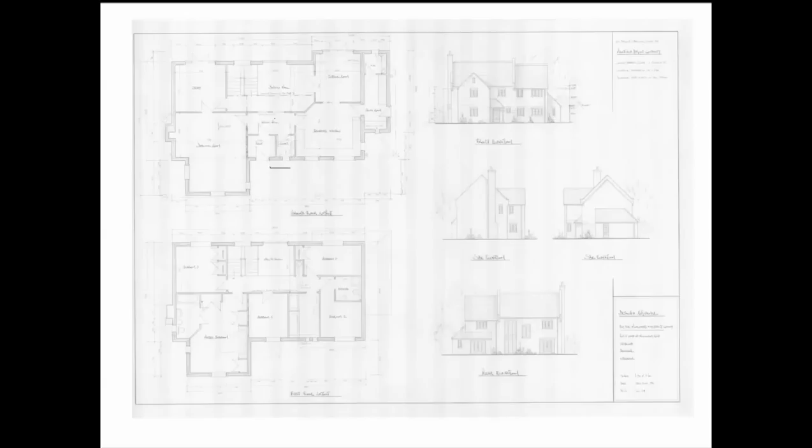So if you have an account with Jewson, for argument's sake, press the button and your set of terms will come down into your software. In addition, on the Jewson catalogue, for argument's sake, there's over 500,000 products. So at any time of day or night, you can go onto our website, onto the Jewson catalogue, and access all those prices. You don't have to wait until the morning to access the prices.

Okay, so a bit of a demonstration now of the scope of what the software can actually do. Now, I don't know how much you can make out on your screens. What I've got here is a drawing of a house that I built as a developer, and I think it was in about '95. And this was a pencil drawing that our technician did. We employed a technician who worked for us full-time, designing extensions and houses. I guess in today's terms, he was probably costing us 30 or 40,000 quid a year. So, a significant investment in order to keep the flow of work coming through the business. I think he would probably have spent 3 or 4 days designing and developing the drawing.

Of course, design is not only just about putting lines on the paper, it is about thinking about it. So that's not to be unexpected. And again, if you bought a drawing like this from an architect, you'd be paying thousands of pounds, no doubt, depending on the architect. Could be one or two, it could be 3 or 4, who knows. They will have a different structure.

So I thought it would be rather fun as an exercise to trace over this house, which I did. It probably took me a couple of hours to trace over it because it's got some parapets and so on that were slightly challenging. But once I'd traced over those, the software would then automatically generate the elevations. And I'm going to be showing you live today how the software does that. And we're going to design a simple project in half an hour to show you how it actually works and develop the elevations.

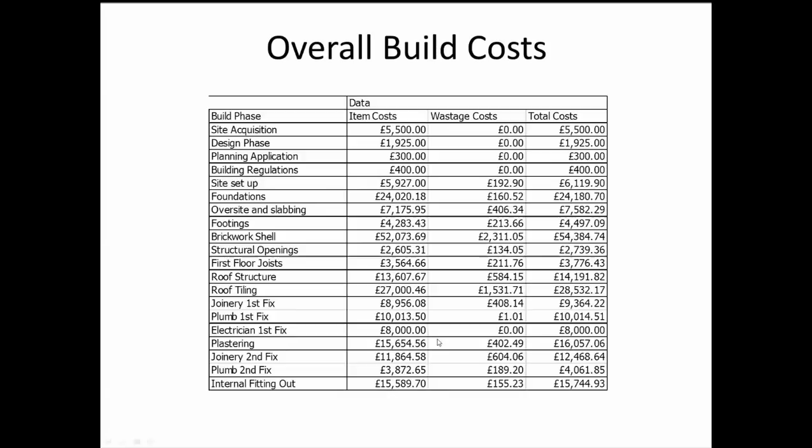This particular view is an analysis of the job by different build phases, total costs. There's another report there showing the cost of the bricks and blocks and labour and so on. And there are literally hundreds of reports that you can produce from the software, and all of those are automatically generated once you've done your drawing. Here you can see we've got a lot more detail. And I'm going to show you how you actually generate this detail in the next few minutes.

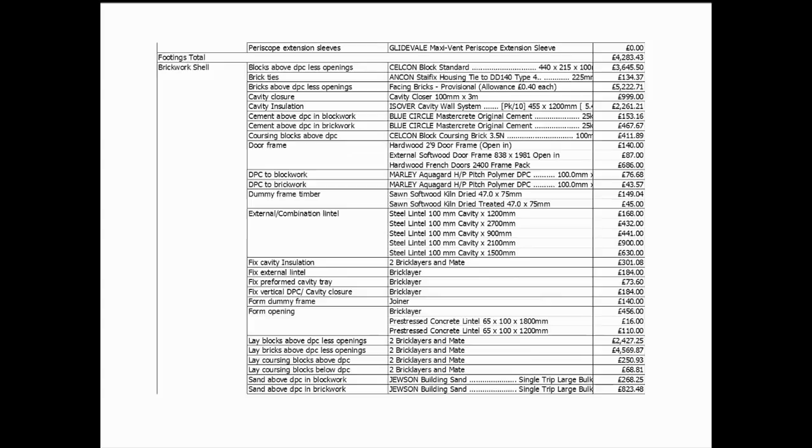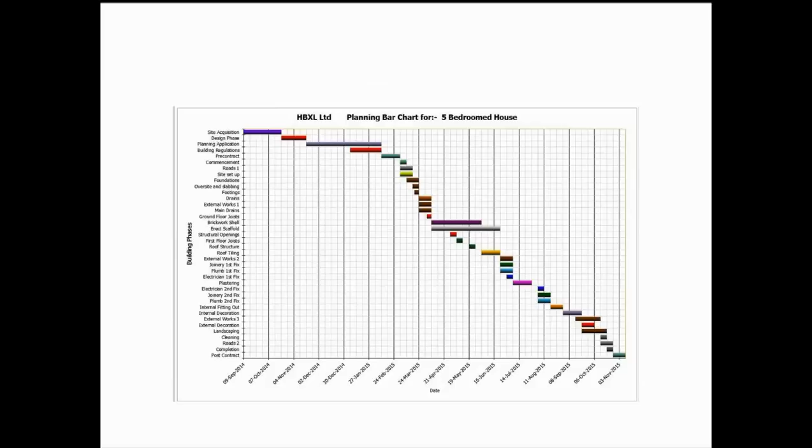You can also, using the onboard Gantt chart system within EstimatorXpress, generate a planning chart, and that itself will generate things such as material schedules, order by dates, cash flow projections and so on. And again, all of that's really easy to use. You can learn how to use this Gantt chart system in 5 minutes. It's not Microsoft Project. It's much more straightforward to use than that, and ideally suited to housing or home extensions.

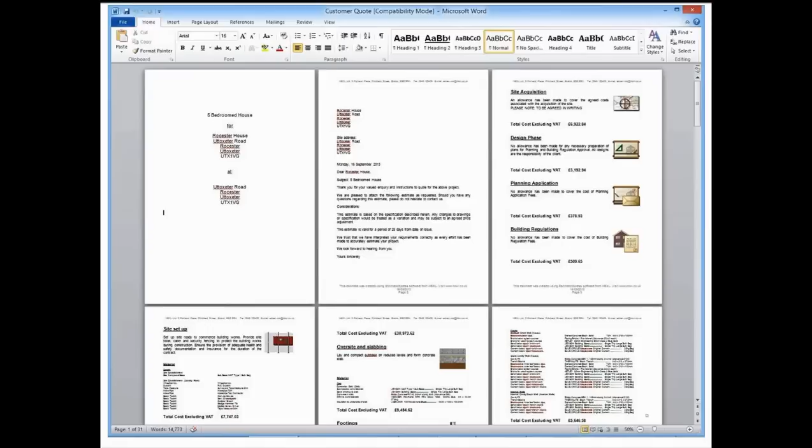Once you've got your estimate, again, you can then press another button and it will produce a detailed quote. If you look at the bottom left-hand corner here, you can see there's a 31-page quote that has been generated by the software. You probably can't see the detail on here, but don't worry about that. We're going to have a look at one in detail in a moment. But again, a huge amount of information is just automatically generated to fully advise your client what it is that's included in the job, and obviously it's worked out the cost of it for you.

As we've said, you've got Health and Safety Expert, which can generate the health and safety information.

And then finally, as we said, Contracts Expert is available. Okay, so that's the sort of scope of the software. What I'm now going to do is to show you a simple design so that you can see the tools that we have available in the software, so that you can start to appreciate that, yes, I think I could actually really learn how to use that.

Okay, so I'm now going to go into PlansXpress, and I've got a blank screen at this stage, and I'm going to create a new drawing. So I go new from template, and from there I can pick the size of paper, the scale that I want to work in. So I'm going to pick an A1 1:50 with title blocks, and you can create your own title block with your own company name and so on embedded in it.

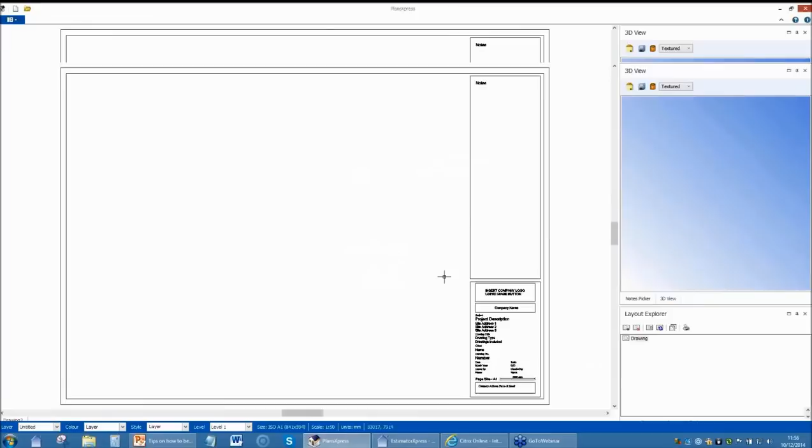On the right hand side here you can see the 3D window that I'm going to briefly turn off while we start to do the drawing. And before I actually start to do the drawing, let me give you a quick guided tour of the scope of the software. So across the top you've got various toolbars. We've got the architectural toolbar where you'll spend most of your life working. We don't tend to use the other toolbars, but it's useful to know that they're there.

We've got the drawing and annotation toolbar, and that allows you to do what I would call conventional CAD work, which is more like AutoCAD for drawing lines, circles, squares, and so on. There are a whole raft of non-estimated symbols. Now they tend to be things like pictures of trees and cars and people, but there's also a whole library of doors and windows that you can embellish the drawing with.

There's an automatic sections generating toolbar. I'm not going to discuss that today because it's a 10 or 15 minute discussion within itself, but that will automatically generate all the sections for you, again with a simple click of the mouse. Modify and selection is a way of stretching and changing the design. So if you've, say, got a particular shaped extension you want to reuse, you can just stretch it rather than redrawing it from scratch. So a job that would take you 10 minutes to draw, you've reduced to 2 or 3 minutes.

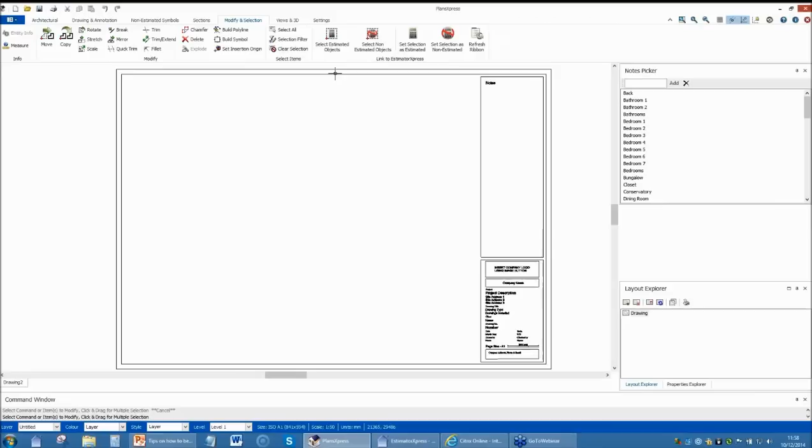Within here you can also select objects on the drawing so that the software ignores them and doesn't estimate them when you export them. So you just pick a wall and mark it as non-estimated. The 3D menu allows you to create 3D images and also to draw elevations, and if you have the Ultimate edition of the software, export it to the photo visualizer, which generates those nice 3D images.

Okay, so going back to the architectural menu, we've obviously got all the different elements: external walls, internal walls, doors and windows and so on. And within each of those elements there are a whole raft of different, in this case, external walls. We've got brick and block walls, cavity block walls, brick and ICF insulated concrete walls, brick and SIPS cavity walls, structurally insulated panels, stone walls, wall cladding, timber

frame, wall starters, basement walls, retaining walls, multi-leaf brick walls for drawing things like garages, brick piers, garden walls. So virtually every type of wall that you can think of, there's a wall there for it. Similarly with internal walls, a whole raft of different walls: internal block walls, stud walls, metal stud and so on.

Doors and windows, we've got loads of different things in there which you can place on the drawing. I'm going to show you how to do that. Same with windows, structural openings, loads of structural openings and fabricated steel, stairs, flooring systems, timber floors, concrete floors, basement floors, rafts and so on. Roofs, cut roofs, truss roofs, structurally insulated panel roofs, flat roofs. Again, we're going to see how those are actually placed on the drawing.

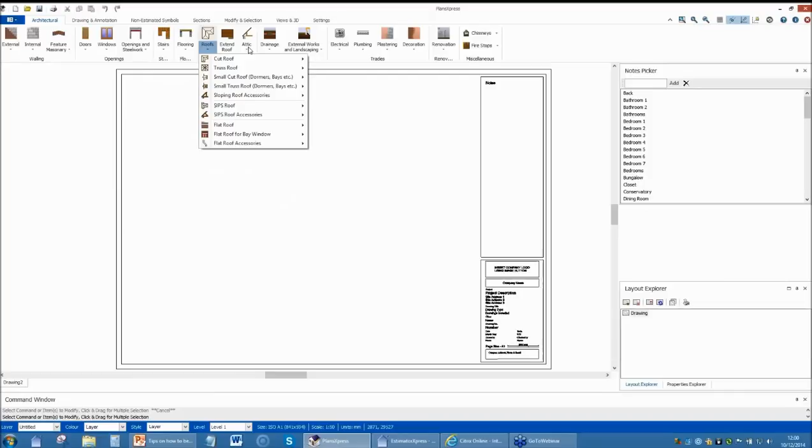Extending roof, that's creating a cat slide roof, as we called it in the Midlands. It seems to have a different name as I go around the country. That's where the roof extends from an upper floor and slides down to a lower ground floor, say. Attic, this will enable you to either do a brand new attic or to convert an existing roof. Again, because it's linked to Estimator, it does all the estimating for that. Domestic drainage, external works, whether that's lawns, paving, block pavers and so on.

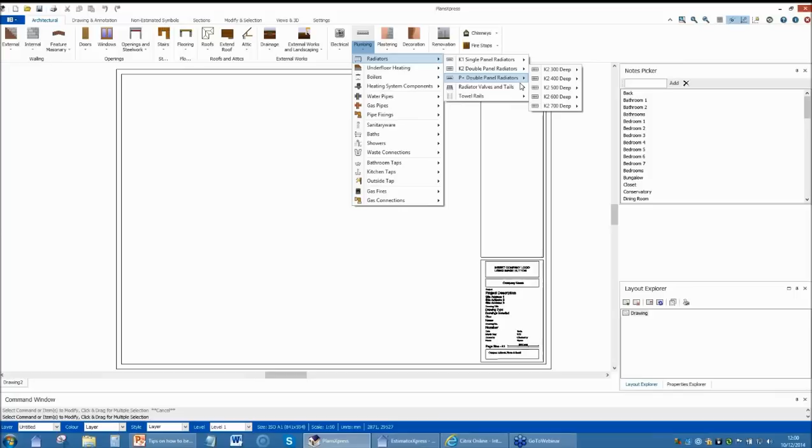Electrics, all the typical internal electrics. Plumbing and heating, absolutely loads of stuff in here to place on the drawing. Numerous boilers and so on.

Now, these three buttons here, plastering, decoration and renovation, they operate slightly differently in that, generally speaking, when you place a wall in PlansXpress and ask the software to estimate it, it will do everything from first dig right the way through the plastering, the decorating on the wall. But of course there may be circumstances where you're doing a renovation job where you just want to plaster or you just want to paint a wall, and you can then draw the wall in the software and then ask the software just to paint and decorate it, to renovate it.

So we look at the renovation tool set for argument's sake. You can see that we've got things like repointing, internal wall refurbs. That's one of my favorite tools actually, in that it does a whole raft of elements such as hacking a wall, replastering it, replacing the skirtings and cornice and dados and so on. So that's more about renovation than design and build, but it's useful to know that it's there within the system.

Okay, so that's the scope of it. Let's actually start to do a drawing. So I'm going to start to do an external cavity brick wall. As I'm going to do a bungalow on this occasion, just to demonstrate the principles because of the time limits that we have, I'm going to pick a 2550 single-story wall. Right, the software then goes away and picks up a dialog to help me design that.

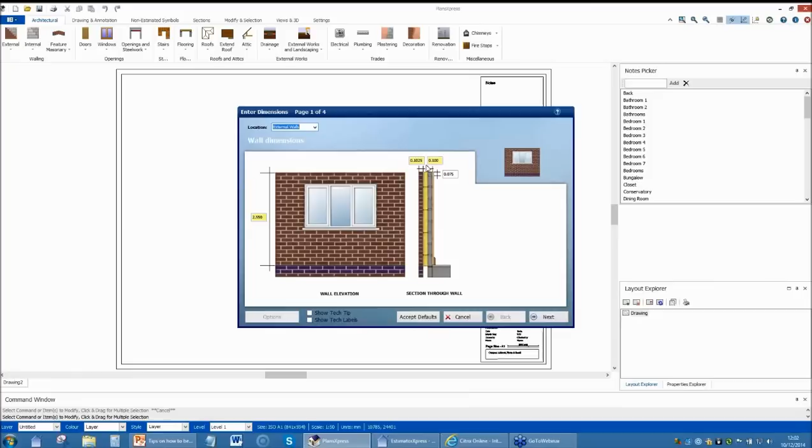Now, if any of you have EstimatorXpress, you'll immediately be familiar with these dialogues because they're virtually the same dialogues that appear in EstimatorXpress. So I can define the location of the walls. Obviously they're the external walls. I can set the height, the thickness of the walls. I can set the depth of the foundation and the width. I can change any of these values as I go along. I can confirm whether I want to plank and strut the excavation.

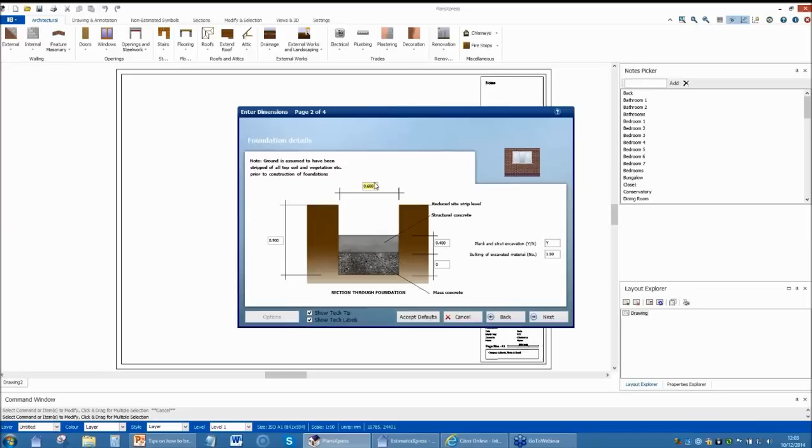Incidentally, the items that are shown in yellow, these are the ones that actually appear on the drawing. The boxes in white are being captured to be exported to the estimating tool. If I click on these two icons down the bottom here and click into any cell, you'll see that it gives me advice about what the software is actually looking for. It's also put some additional labels on the screen.

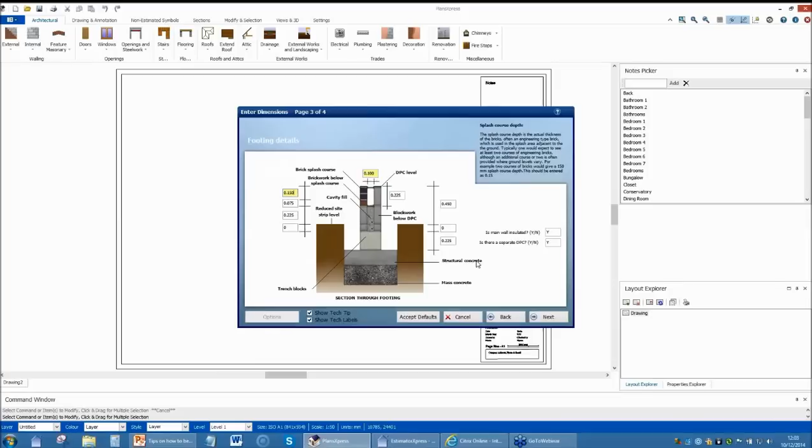Okay, it's now asking me about the footings. Again, I can turn these labels on or off if I want. I can vary the height of the brickwork within the splash course and so on. But generally we've set these up to be standard building regs details. And then finally, I tell the software whether I want to plaster and skirt the walls and decorate them. Now again, because these boxes are all in white, they're being collected for the estimating tool and also for the specification tool. So I'm going to press finish, and I can now place items on the drawing.

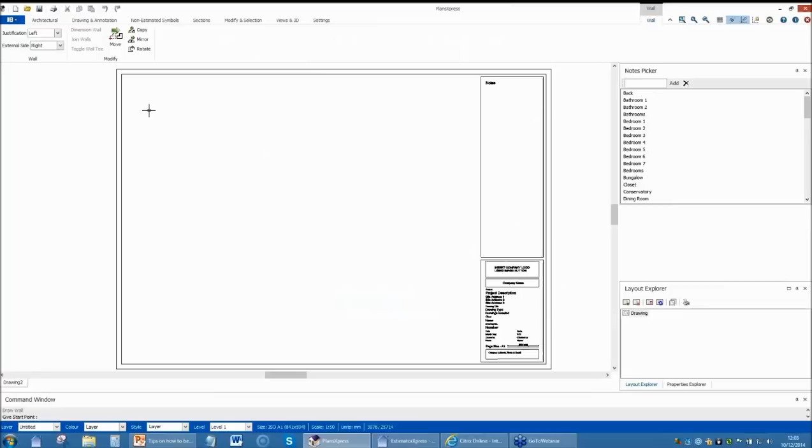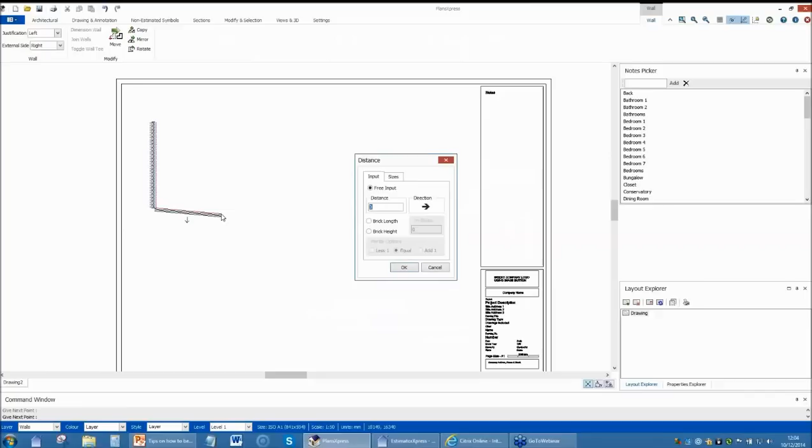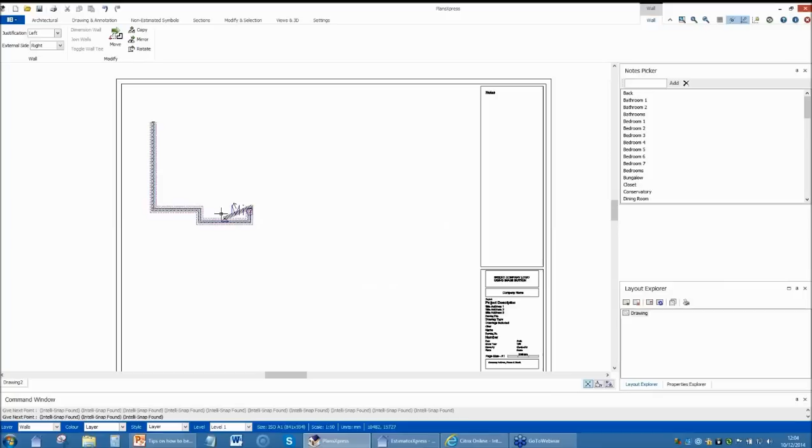Now at this stage I can either place them manually, or I can press the arrow keys on my keyboard and actually enter the dimensions in manually. That's done that one wall. So let's say I want to come across the building 4,500. Maybe I've got a projection coming out on the front of my bungalow. Take that back in, 1,200. Go across, 450. And if I press S on my keyboard, it'll actually complete the overall shape of the bungalow.

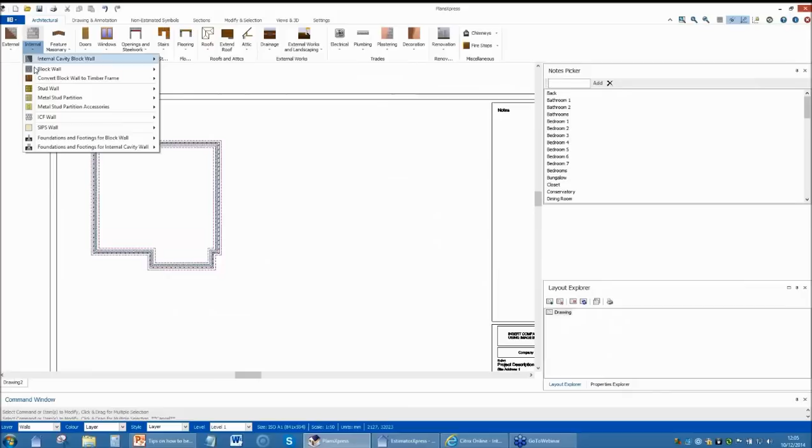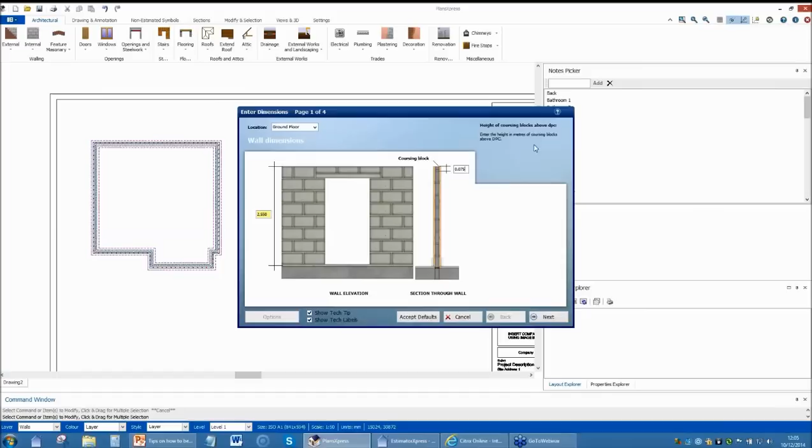So I'm going to do a block wall, 2550 single story again. Again, I can confirm the height. I can put my labels on if I'm not sure about anything. What's going on up here, for argument's sake? That's the height of the coursing blocks. I can set the depth of the foundation, the width, concrete thickness, and so on. I can confirm the height of the coursing blocks and so on.

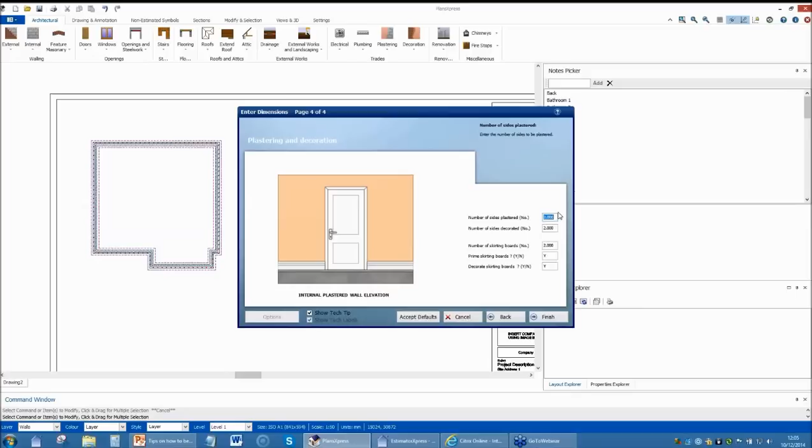So again, it's all perfectly straightforward, and it's just a matter of checking the dialogue, confirming that you're happy with it. In this case, we've got two sides of the wall plastered and decorated, and a couple of skirting boards. I can then place this on the drawing.

Now this time you can see the wall is actually on the incorrect side of the wall. If I use the justification command, it then puts it on the correct side. So I'm going to take up there, and you can see it's found the perpendicular, and that's then drawn that wall. If I wanted to set out a wall from a corner, I can place it on the corner and press R on my keyboard and come down, say, 3,000 millimeters.

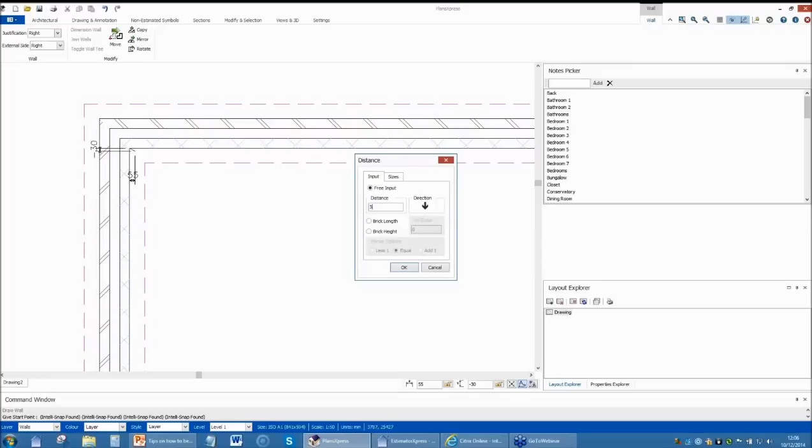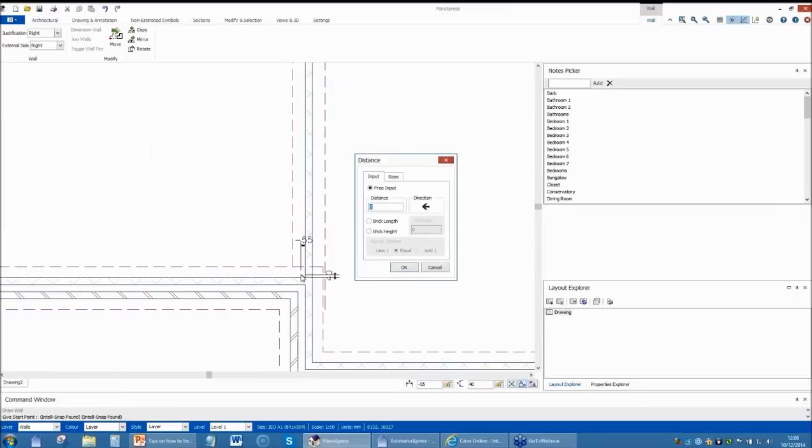Once I've done that, it then again finds the perpendicular and draws it in there. So just as a bit of an exercise, I'll place a corridor in here. I use the same technique: R, press my arrow keys, 2,000, press F7, and place them up there.

So I'm really just working quickly on this. It's not much of an architectural masterpiece, as you can see. I'll just place another couple of walls on here. I just missed that point there. If I want to, I can then move any wall if I'm playing around with the design.

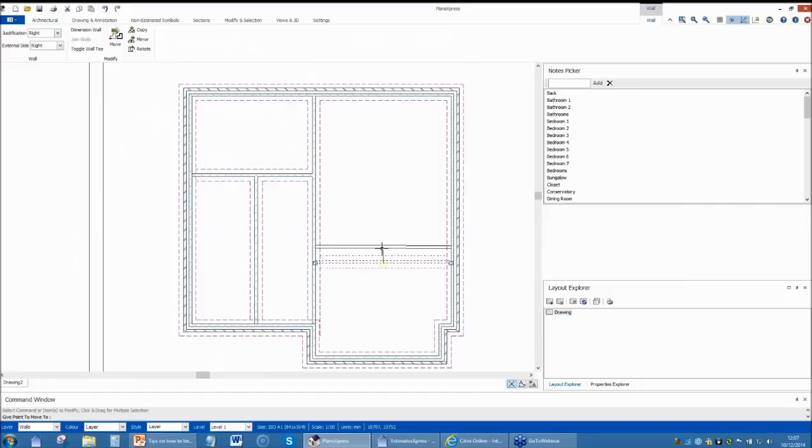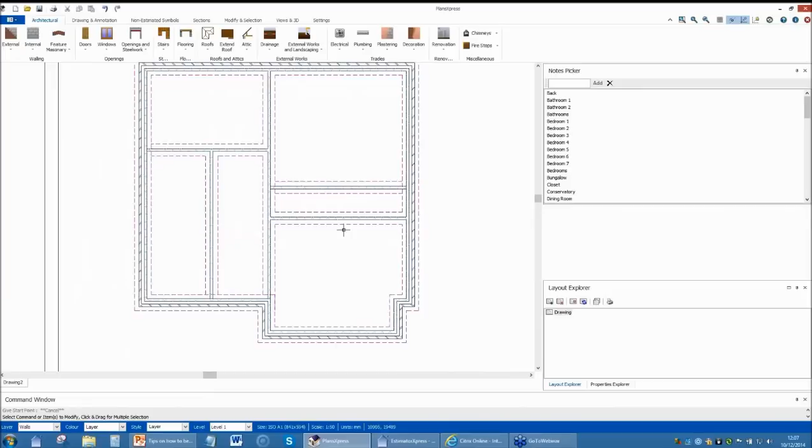Program's running a little bit slowly because of the broadcasting software we're using. Normally it's a bit more responsive than this. Again, we can have a look at the 3D preview to see whether we're happy with the basic design. Okay, as I say, I've probably not done the best job of this, but you get the general idea of it. We may look at this and think, well, that room's a bit long and narrow.

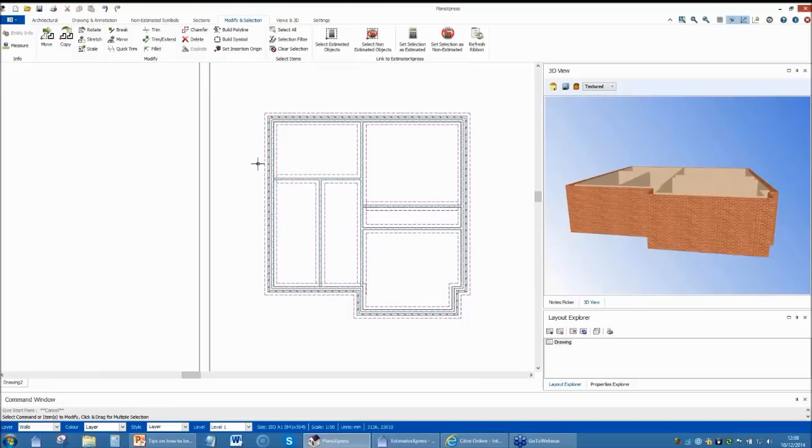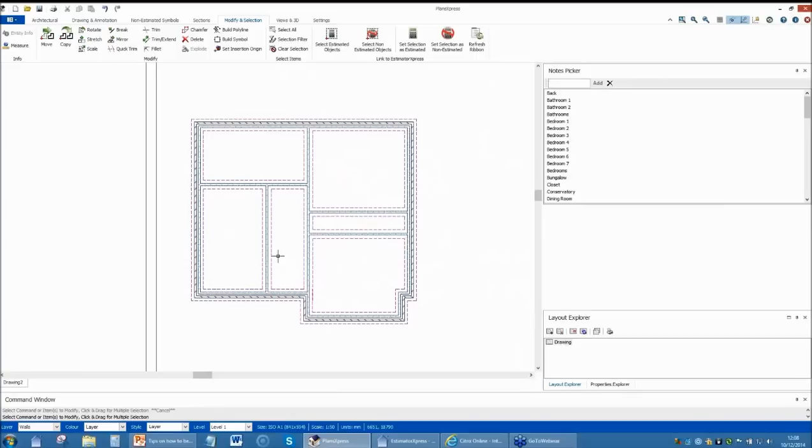We can actually use the modify command. If I find the stretch command, I can find that. Let's just close my 3D a second. I can say stretch that building by 1,000 to get a better shape. Refresh the drawing, and it just tidies up the corners. So you can see that if you've got an existing design, it's very straightforward to stretch it.

Okay, moving quickly on now, we're going to place some doors and windows now. So I'll put the front door on it first.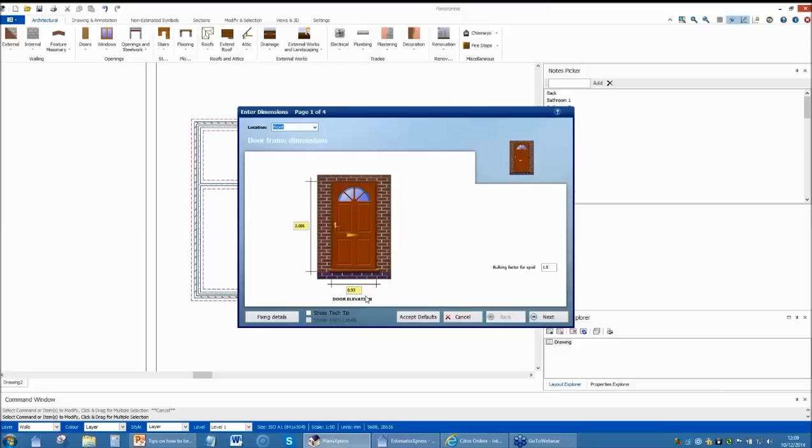Confirm the width and height of the door. Now these relate to a real world door, so when we fire this into EstimatorXpress, it's actually going to estimate the cost for it. So normally you wouldn't change those doors unless you were using a custom door. We can change things like the fixing centers so that it schedules all of the materials, all the fixings for fixing the door.

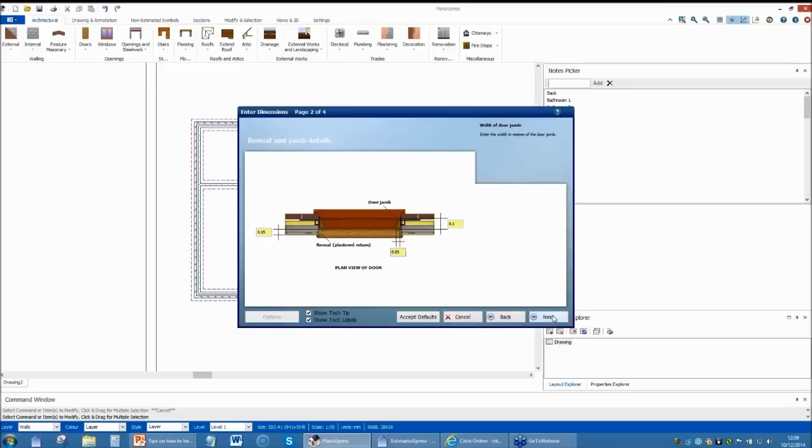We can set the depth. I wonder what's going on here. Let's put the help on again. That's the reveal depth, the depth of the frame as it will appear on the drawing. We can confirm that we want to plaster the reveals, whether we're plastering the sill or using a threshold board, and whether we've got any fixing centres and so on.

Finally, we confirm whether the door is primed and stained and so on. In this case, because it's a traditional timber door, we're allowing for the door to be decorated. I can then place that on the drawing. By moving my mouse around, you can see it hangs the door.

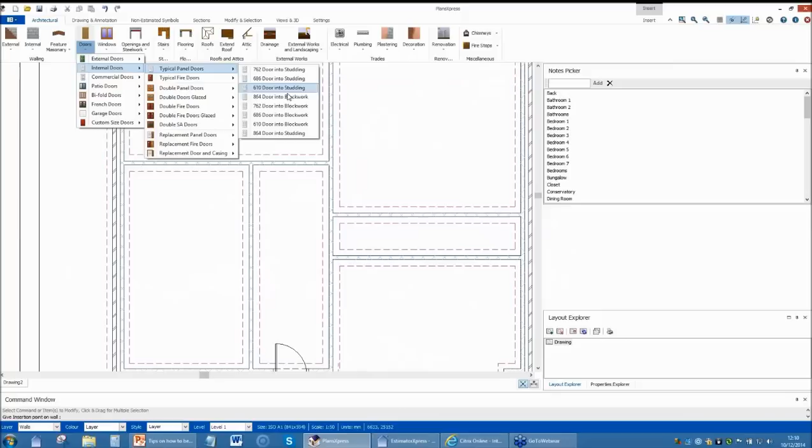And I can repeat the same process for the internal doors. Now, because we're in quite a hurry here, I'm just going to accept the defaults because they're probably pretty good anyway. And the software just allows me to place the drawings, place those as I go around very straightforwardly.

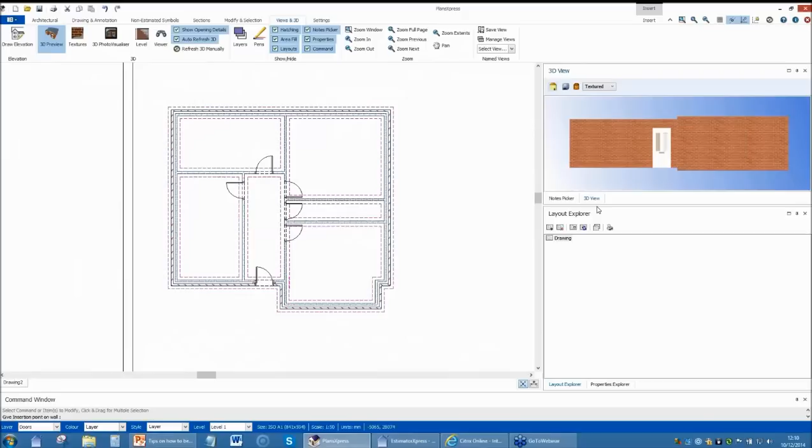Okay, and again, we can have a look at the 3D, see whether we're happy with the general layout.

Okay, so some external doors. I've got a couple of bifolds on the back. They seem to be very popular at the moment. I'll accept the defaults for those.

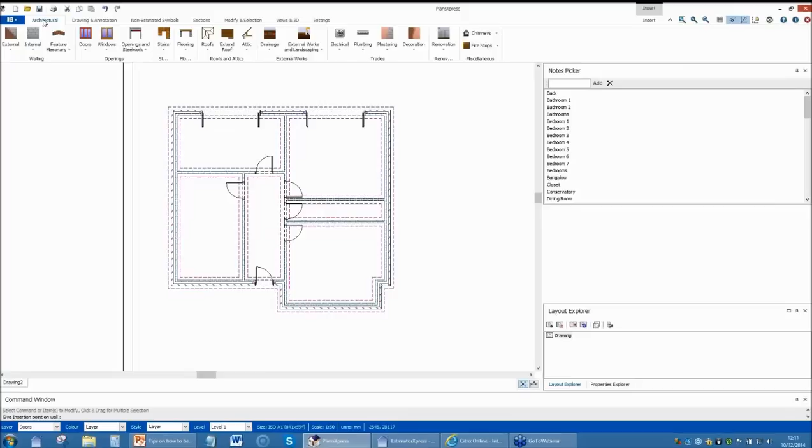And some windows. And we'll put a bay window on the front.

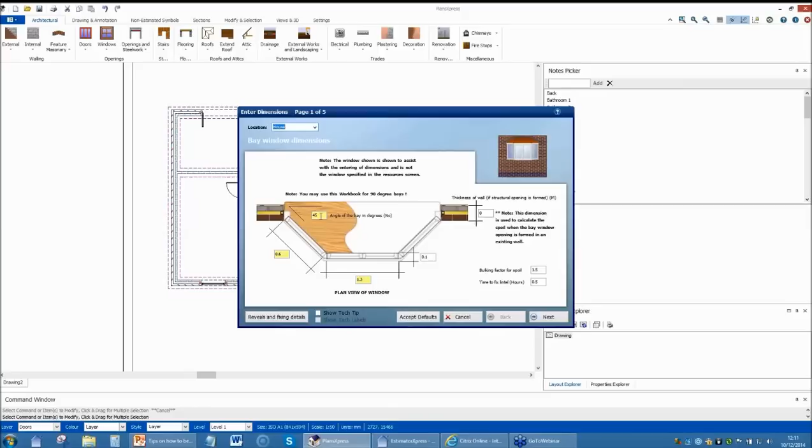Again, I can vary things like the angle of the bay, the size of each of the facets, the height of the bay above the damp-proof course, the height of the window, and one or two other dimensions confirming the frame sizes. And finally confirm whether I'm putting a window board in there and plastering the ceiling and so on.

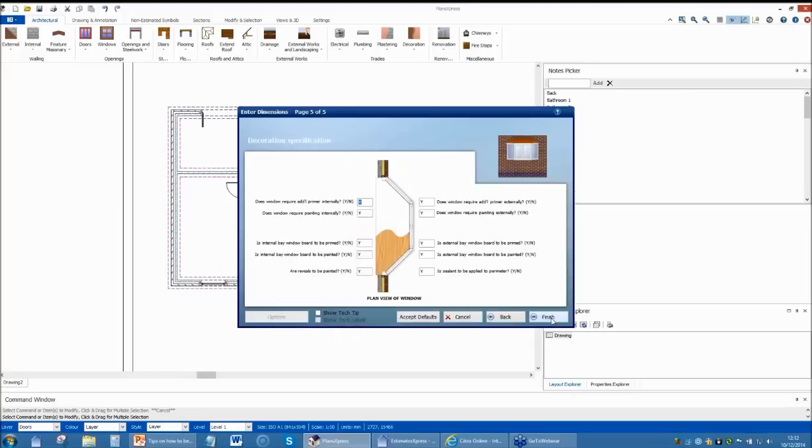Software automatically draws the bay, and while I think about it, I'm just going to pop the roof on. So it's a small cut roof for a bay, say 40-degree pitch. I'm just going to accept the defaults on that for the time being with a hipped roof.

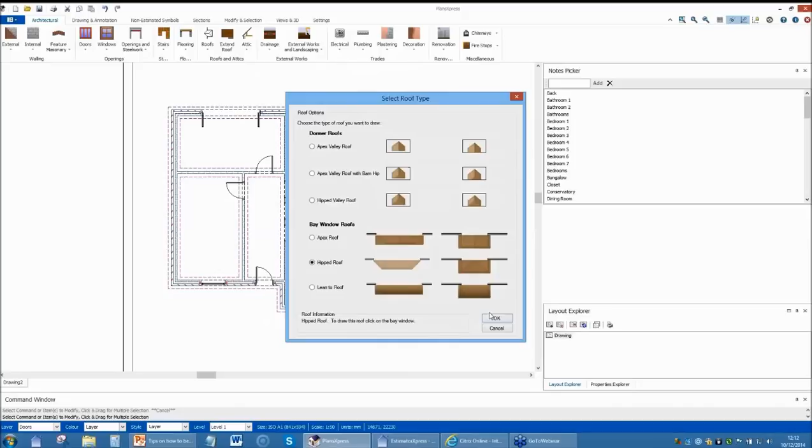So that's done that. So I'll just now put the main roof on. I'll go through that in a bit more detail so you can see how that works. So I'm going to do a 40-degree cut roof.

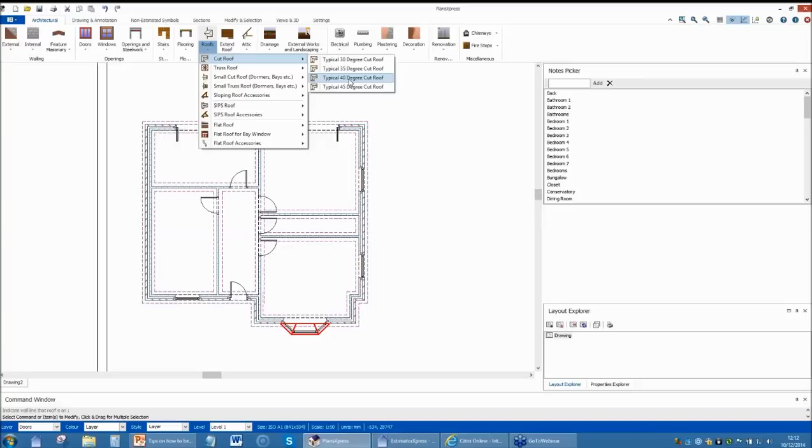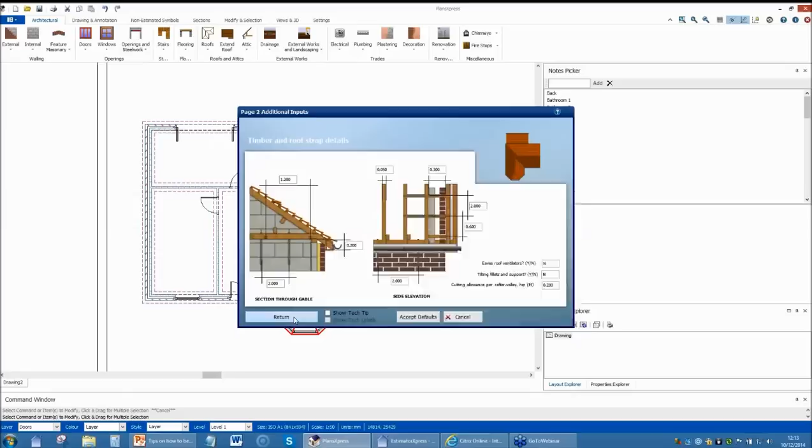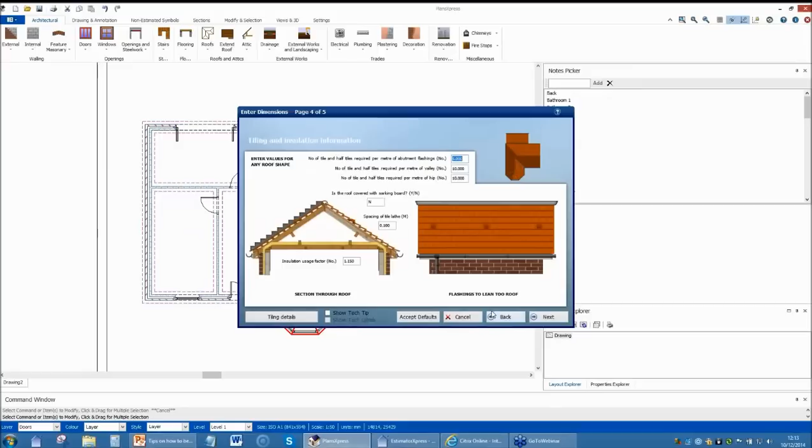So I can confirm the pitch of the roof. Obviously these can be changed. I can set the soffit widths. I can define all the strapping details and ventilators and so on, because the software will schedule all of the timbers for that—9 times out of 10 you'll be going along with the standards. I can define my rafter and joist centres, heights of the barge boards and so on. I can define my gutter bracket fixing centres—maybe we'll tighten those up a bit. I can define my tiling details. By default we have a clay tile in it, so this is all set up for that. And then finally I confirm whether I'm painting my fascias and barge boards.

I know that by default we've got a plastic fascia here, so I'm going to set my decoration to no.

The software then throws up a series of dialogues which allows me to choose the type of roof that I want to do. So we've got apex roofs, apex valley, and abutments where it butts up to an existing wall. We've got hip roofs, hip to both ends, valley hip, and abutment hip. We've got barn hips or Suffolk roofs, depending on which part of the country you come from. And we've got lean-to and lean-to with a hip end.

Essentially, you can Lego-block any of these roof shapes together to give you probably 95% of the common roof shapes that you'll come across, and probably 100% of the roof shapes that you'd like to build. Because as a designer and builder, you can build things that are practical rather than just look nice on an architectural plan. So I'm going to pick an apex roof to go on the main roof of my bungalow.

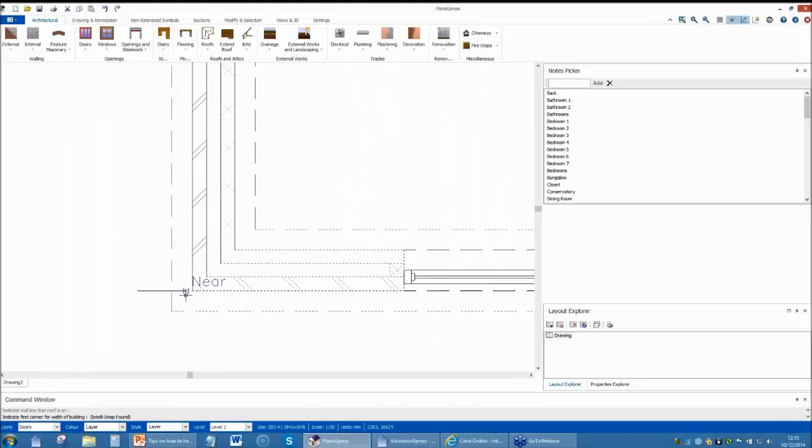Now, incidentally, at the bottom here we've got what's called the command window, and you can see it says indicate the wall line that a roof is on. This gives you a series of instructions for every entity that you place on the drawing. So I'm going to stand it on that wall, and it then asks me to define the first corner and the second corner of the roof across the gable, and then the length of the roof.

And you can then see the red outline of the roof has been formed. Now, what you may also see here is that a dialog has popped up, and this is doing what we call daisy chaining. This allows you to—or reminds you not to forget about crucial things in the design. What's the ceiling? What purlins do you want? What rainwater pipes, and so on.

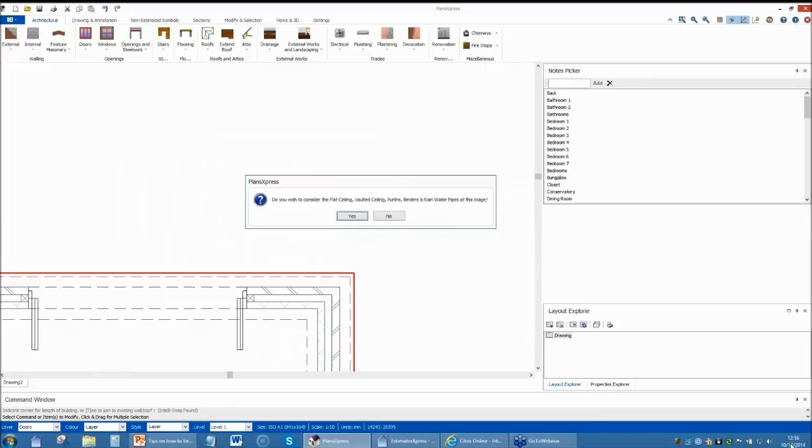So we've only got about a quarter of an hour left to run now. So what I'm going to do is skip through that, so we've got time to look at the estimating tool. But I hope you can see that you can place those sorts of things really quickly. So I'm just going to say no, I don't want to do any of those for the time being.

And repeat the roof for the front projection. Again, I'm going to do an apex roof. Select the wall that the roof sits on. And then again on the command line it says indicate the corner for the roof, either the third corner, or press T on your keyboard and click on the appropriate roof.

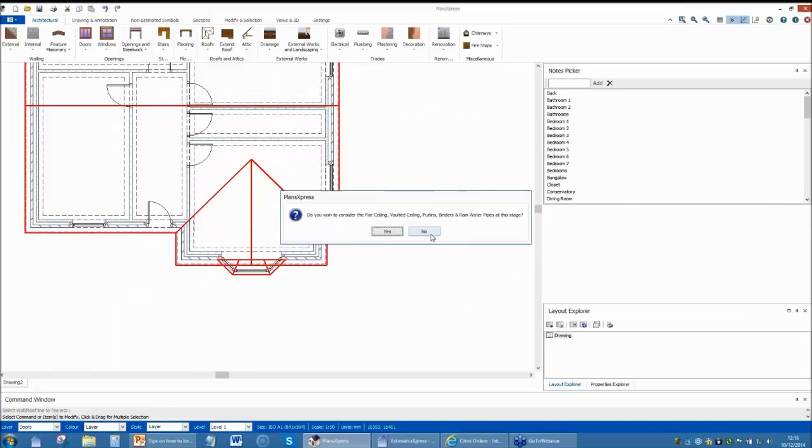And you can then see that it's formed the valley there. And again, it's doing this daisy chaining function, which again I'm going to say no, I haven't got time to do that just now. Okay, so we've now got the basic outline of our bungalow or house, and we've probably spent, I think, about 10 minutes doing this.

Obviously it's not a refined design. In the real world you're going to be spending an hour or two thinking about this, or, as we've said, tracing over an existing job that you think, yes, I want to do something like that, and adapting it.

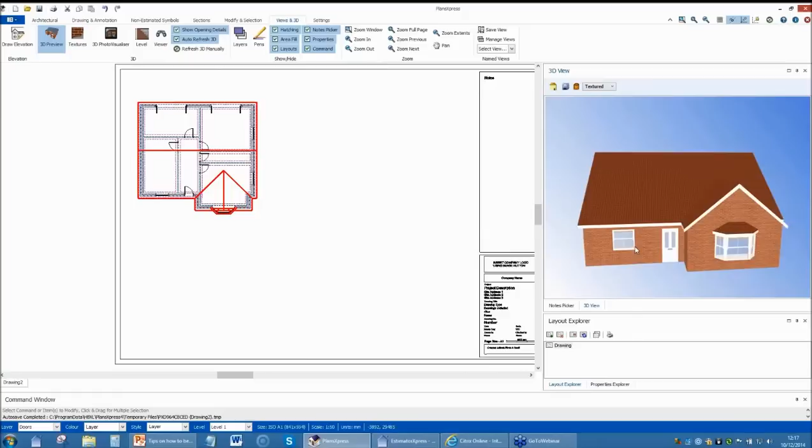Okay, the first thing I'm going to do now is have a look at the 3D again. It takes a little bit longer as it's building the 3D image. And you can see there we've got a full 3D graphic. So if you imagine that you're able to go back to your client with that quality of information straight away, I think that's a big difference compared to going back to them with a 1 or 2 page description.

Okay, now I'm going to quickly show you how the elevation tool works. So I've gone back to my 3D menu, clicked on the elevation. Again, looking at the command window, it says give the wall that you want to elevate. Give your observation point—i.e. where are you standing to look at the elevation. How far into the building are you looking? I'm looking at least as far as the ridge, and the extent of the elevation I want to draw.

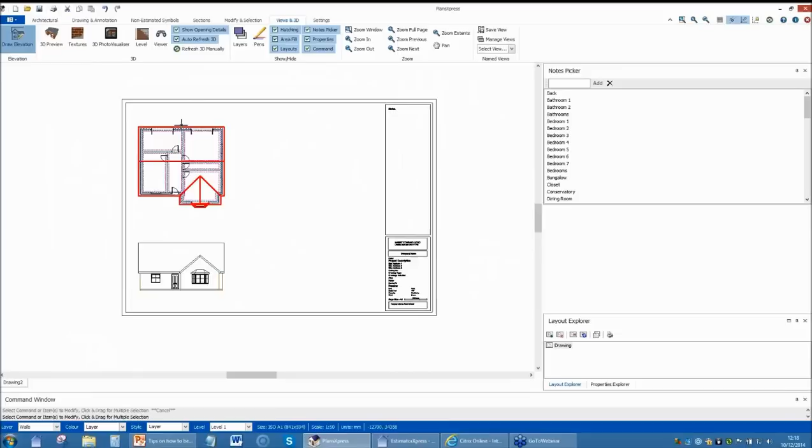I can then position that, and you can see it's developed the elevation for us. I'll just show you that again. Rear elevation: stand at the back, draw as far as the ridge, the extent of it, and then place it on the drawing. I want to make sure I align the damp-proof courses.

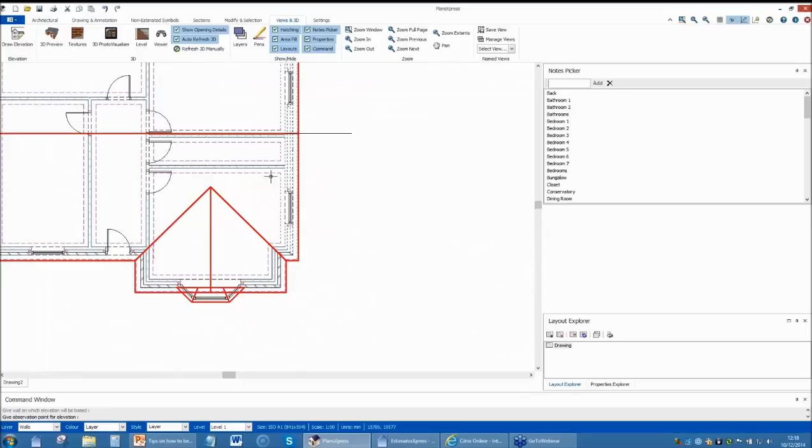The software does that, and then finally a side elevation. I want to go as far as that ridge, pick up the bay and so on, and I'll just place that over there. So again, you can see in a quarter of an hour we've done a very simple job, including the elevations.

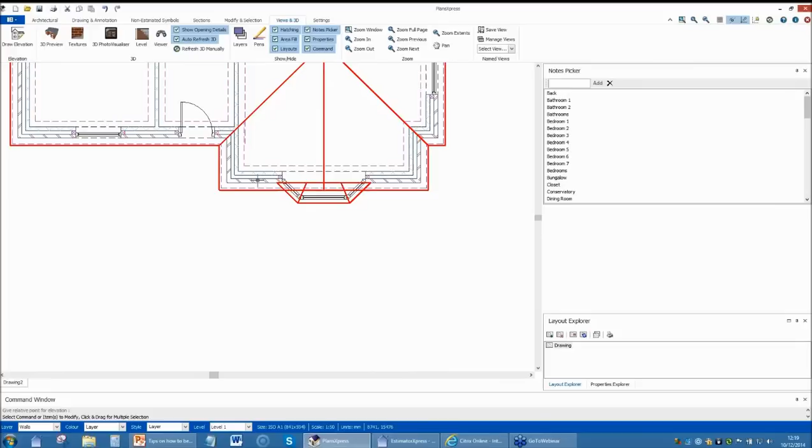Just very briefly to show you the dimension tool: click on any wall, press the middle button, press dimension, and the software automatically generates the dimensions. The software actually works quicker than this when you're not connected and broadcasting over the internet. It's getting a bit confused with the internet there.

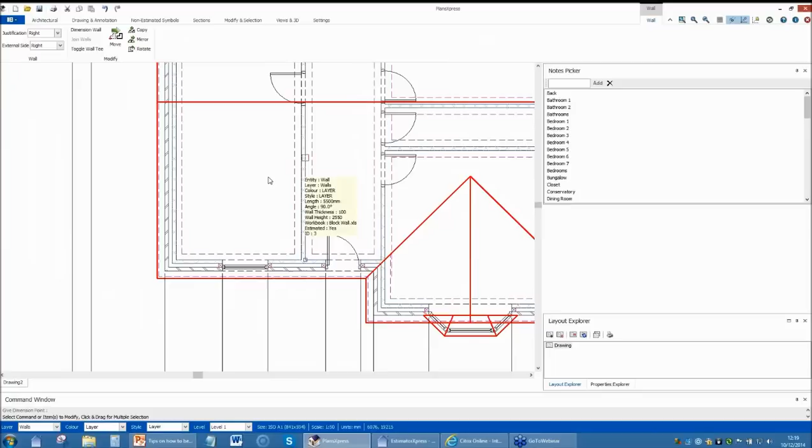So I hope you can see that in a few minutes you can dimension the entire building. Internal walls are exactly the same, using the same process. Just choose the wall, middle click, and place your dimensions.

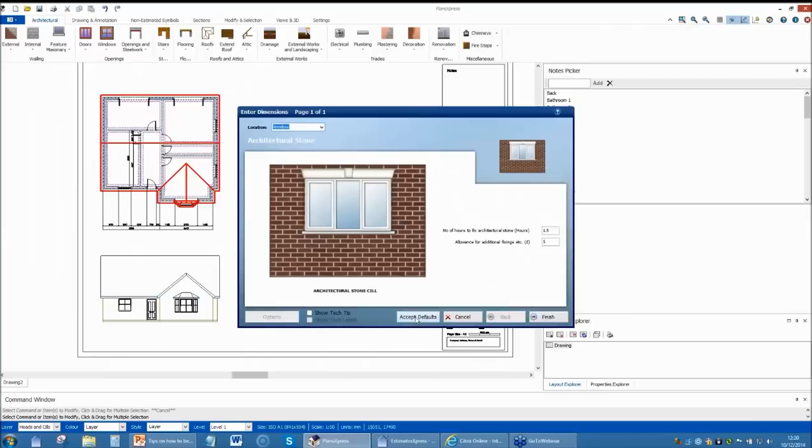Okay, so the other thing that's perhaps briefly worth showing you is the wall detailing. In this case I'm going to put some sills under my windows. So I choose the sill, and I can then place that on the drawing.

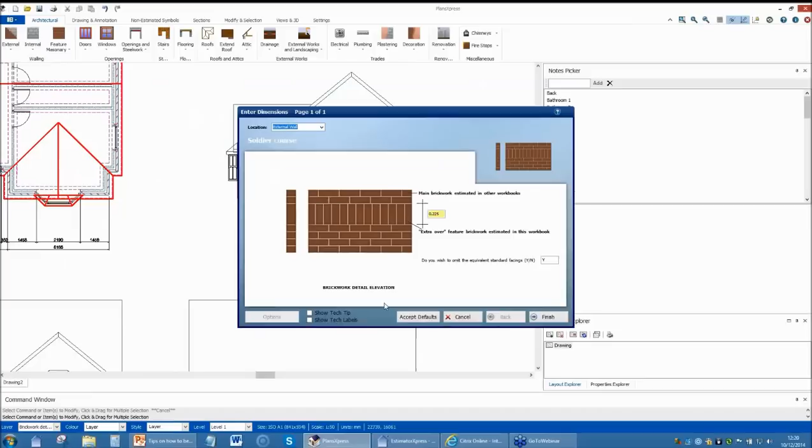And as a little exercise, I'll just show you how to do a soldier course. And there you have it. So, as you can see, within a very short space of time, you can develop attractive looking drawings.

Over here, you can also see that there are notes pickers to place on the drawing, names of elevations and so on. You can also use the tools embedded in EstimatorXpress to automatically generate a whole series of notes that you can either drag onto the drawing or just print out as an A4 set of notes ready to go.

So we've only got 10 minutes left now, so I'm going to very briefly save this drawing. Give it a name — you can still do daft things with your capitals. Bungalow number 1, and save that.

Okay, I'm now going to flick into EstimatorXpress. So here we are in the EstimatorXpress tool set. Just at the risk of stating the obvious, we've actually got two software packages: Plans Express and EstimatorXpress.

You can just buy PlansXpress if you want to and do a design service, or you can just use EstimatorXpress on its own to do estimating. But where the software really takes off is where you get the information from Plans to talk to Estimator, and it does all the input for you in effect.

I'm going to go into the labour section, and here you get an opportunity to input your hourly rates. This is really important because, as we've just been saying, hourly rates can differ dramatically between areas of the country, or indeed particular gangs — you may have one gang that works very cheaply and one that's expensive for better quality work.

So spend a couple of minutes going through that and changing it to reflect the rate that you are paying. That's absolutely crucial. Same with plant — you need to spend a few minutes going through that and tweaking the plant rates. In terms of the materials, as we were saying,

Moving quickly on, because we have so little time, you can then go into the specifications. Again, we set up different specifications for different areas, and we could choose different price books for the different specs. I'm going to choose my master price book. Here in the specification library, you can see that by default we have a number of specifications set up for different jobs. So I'm going to go for the new build Part L spec. The software has been updated to take that into account.

What that allows you to do is set up your own default material for each element within the job. So in this case, we're in the cavity wall spec, and if we look at the bricks above DPC, I can turn a label on to help us see that. By default we've got 40p allowed in there. If I wanted to, I could jump to the price book and choose a more expensive brick to add. Now I've got a 60p brick in there, part of the brickwork shell that attaches the information to the Gantt chart. 60 bricks times 60p is £36 a square metre.

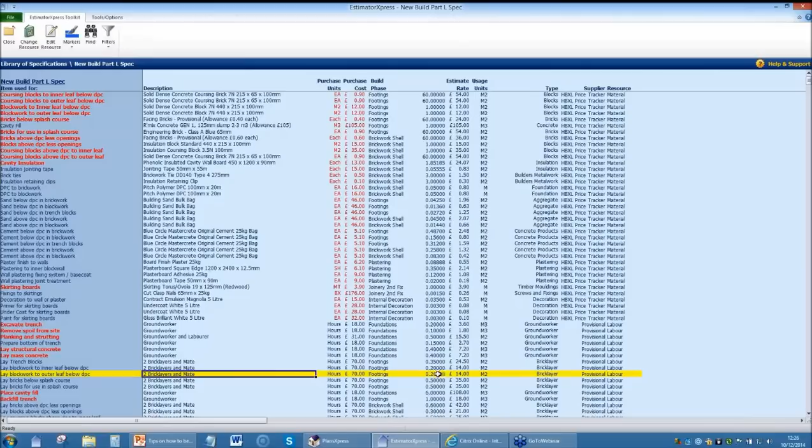So every element in the job is set up in that way. Similarly with the labour, we have a 2-on-1 gang there. You may recall I just changed their price to £70 an hour. By default, to lay a square metre of blockwork, we say it takes 0.2 of an hour, so they're in at £14 a square metre. So every element in the job is specified and estimated automatically by the software.

You can set your own profit margins, and I would suggest that's set at 30 or 35%. I'm doing a demo tomorrow about improving your profit margins, and it's quite clear to me that many builders don't set their margins high enough to cover their overhead. So join me tomorrow if you're interested in that.

Workbooks are all the calculators that do the work and do the estimating. There's a workbook for every CAD entity that we had in the other software. So every time you place something on the software, it estimates it for you. We haven't got time to look at those today, but we may see them in the estimate we're going to do.

Okay, so I'm now going to create the estimate. I give the job a name and a description, and I import the job. So there you can see bungalow 1 that we did at 12:21, 6 minutes ago. I can bring that in there. You can then see a little thumbnail of the bungalow, so you know you've got the right drawing. Press next, choose the price book with my £70 labour in there and my other elements.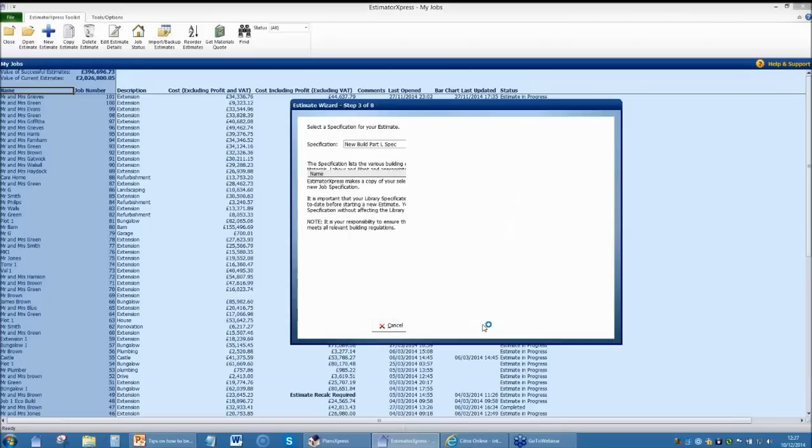Choose the specification. I'm going to pick the Part L new build spec, which has got my new 60p bricks in. I pick the Gantt chart, the planning chart for the job, and when I'm going to start it - January 2015 on the 12th. It's a bungalow, and I put the customer's name in. That used to be my old stomping ground, Leicestershire, where I built all my building projects.

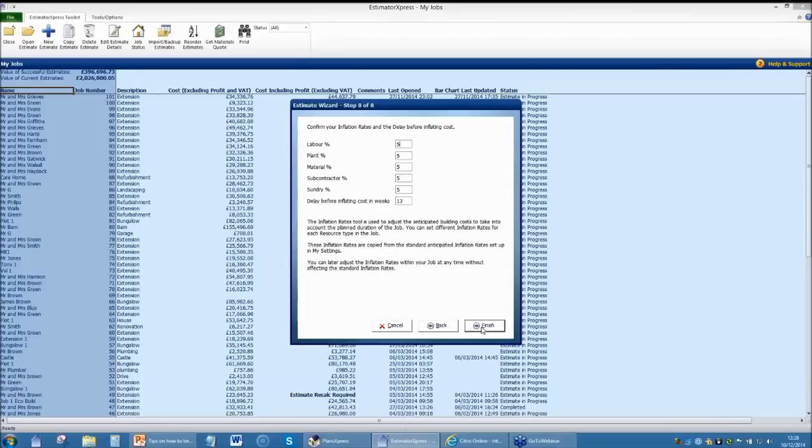Set the profit margin at whatever rate you're comfortable with. Set your rate of inflation. What this will do is automatically build in an element of inflation for the job based on the Gantt chart that you've just created for the estimate.

So the program will now go away and pull in all the geometry from the CAD system. It's going to bring in only the elements we've laid out - obviously the external walls, internal doors and walls, external doors and windows, roof and bay and so on. At the moment, you've probably noticed we didn't have time to put the slab in or lay out the drains, but all of those elements could have been placed on the drawing, both from a design perspective and also from an estimating perspective. Clearly it's going to take a little bit longer than a quarter of an hour to do, but hopefully it's going to give you a good idea of what the software will do. So it's pulling in the geometry of those elements.

It's looking up the latest price book, and in the ordinary way we would have refreshed all those prices from the web with a single mouse click. That normally takes a couple of minutes. So you know you've got your live pricing from, say, Jewson's. You know that you've tweaked the labour rates to reflect your world, the same with the plant.

You've picked the specification, the new Part L spec, so that you know that you are devising a job that is to the current building reg specification, and the software is doing the rest for you. So you can see there it's starting to pull in the information. It's done the front door and the walls and so on.

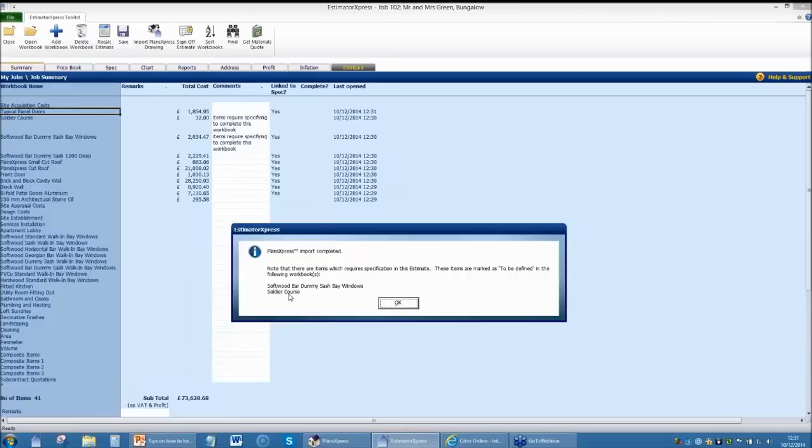Okay, you can now see that the software has completed the import, and it's asking us for a little bit of information. We need to define the soldier course, for argument's sake. What sort of brick do we want to use on that? I'm going to ignore that for the purposes of this.

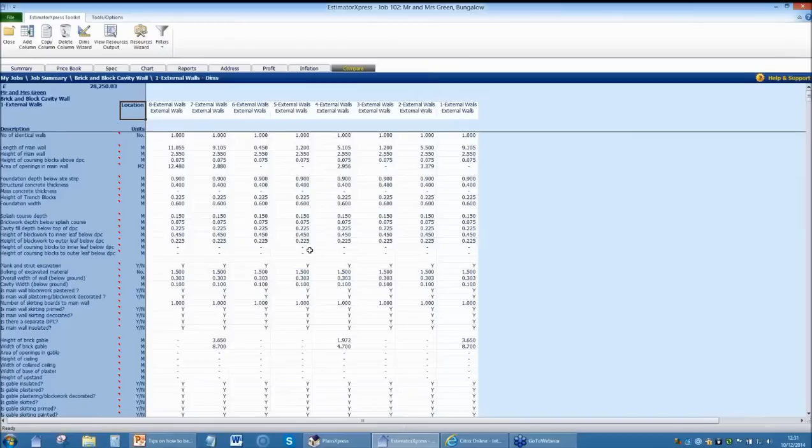And if we have a quick look inside the estimate, let's say the brick and block cavity walls, you can see we've got that cost for them. The software has imported all of those walls directly into the software. It's picked up all the geometry. It's done some calculations, and it's then associated each of those areas, lengths and volumes with the different elements within the job. So for argument's sake, you can see those 60p facing bricks. There's 123 square meters of those.

If we go to another view on the software and look at those same bricks, there's those bricks at 60p each, £36 a square meter plus wastage. The software automatically adds that in. 123 square meters, £4,450 plus wastage. So there's a budget of £4,784, and the software is telling us, including waste, that we need 7,974 bricks for that little bungalow.

That sounds about right, doesn't it? If you'd asked me to guess it, I'd have said there was about 8,000, so clearly the software's in the right ballpark. Similarly, brickwork above DPC, there's the labour rates. It takes 0.6 of an hour to lay a square metre of bricks, £42 a square metre. Same area of bricks and a budget for doing that. And the software has done that for each and every element within the estimate.

Okay, now in terms of creating your specification for the job or your quote for your client, it's simply a question of asking the software to generate a quote for you. So I'm going to ask it to do a quote by build phase. That means the software will break it down phase by phase. What are the costs of the foundations, walls, roof and so on.

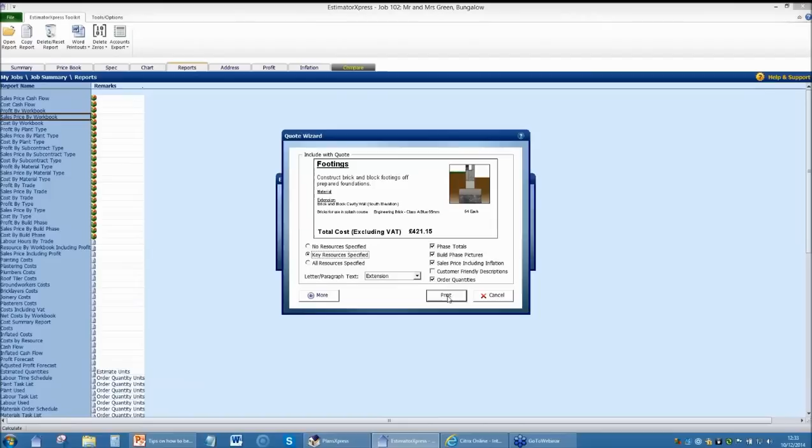I'm going to put the quantities in quickly for this exercise, press print, set the rate of VAT, there's no VAT on this new build, click OK, and the software will generate the quote for you. See, it's building the items for you. So it's merging all the information from all the different elements of the job to give you your quote.

Now you can embed this on your own letterhead, or you can design your own letterhead within the software, and it will automatically print that together. You can devise your own letterhead, your own opening letter for it. By default, we've got a standard letter. I'll just enlarge this for you.

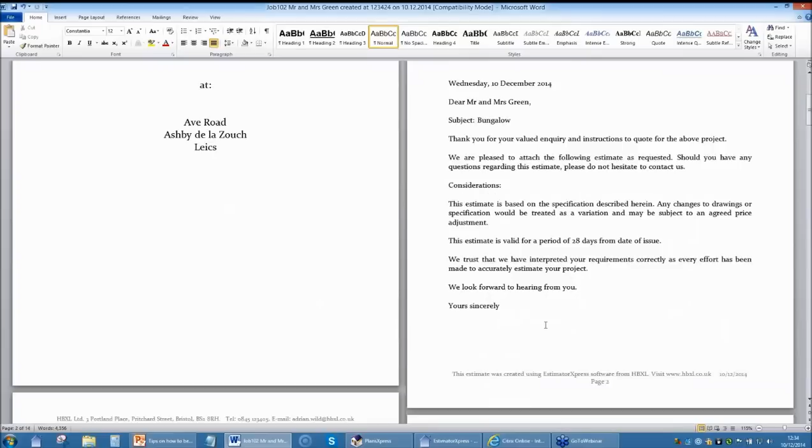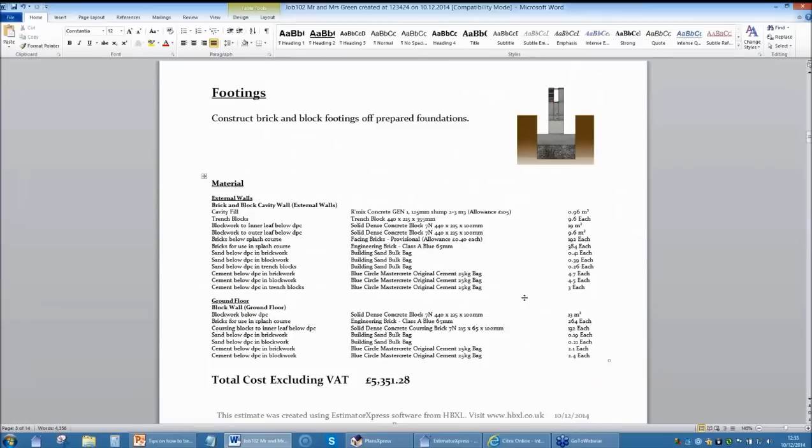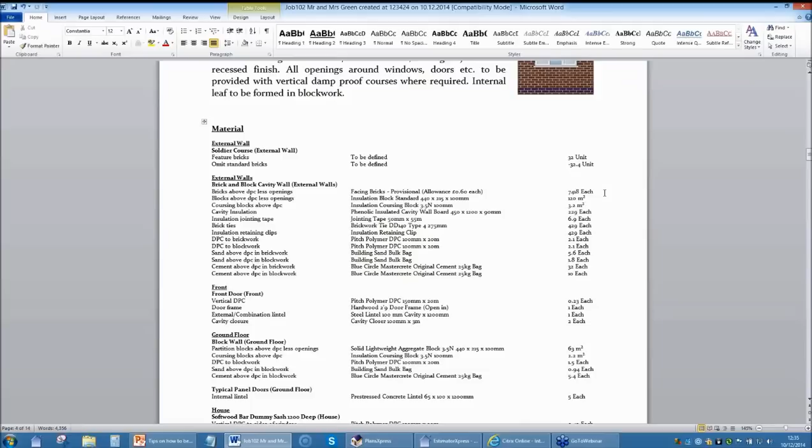If we go to the brickwork shell, you can see there the bricks above DPC. It's picked up those 60p bricks that we put in there, the 7,418 excluding the wastage. And it's done this for every phase of the job. You can see there's 14 pages. So you've got your brickwork shell all described. It's picking up things like the damp-proof courses, the combination lintels, dummy frames, cavity closers.

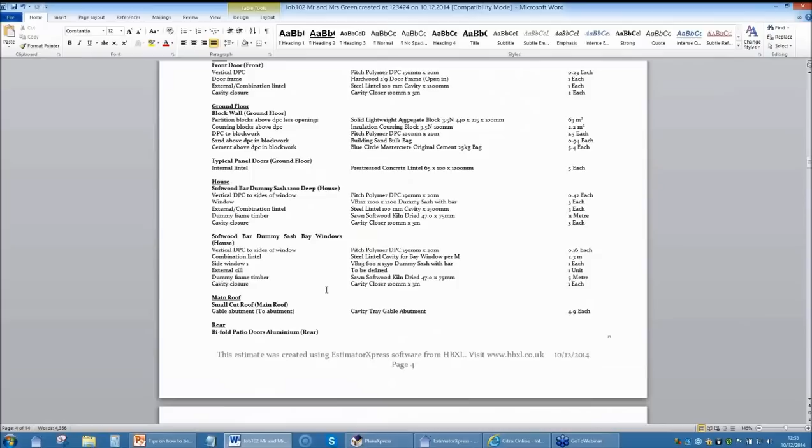It's picking up the abutments for the small roof on the little bay at the front. It's put in the vertical DPC and combination lintel for the bifold. So everything is merged together appropriately. There's all the roof structure. There's some assumed timber sizes which you can change. Joinery first fix. You've got your door casings and window boards being fitted.

Plastering I always think is quite interesting because you can see it's picked up the brick and block walls, the front doors, block walls, windows and so on. Joinery second fix, internal decoration.

So if you just cast your mind back here, by simply drawing a few lines on the CAD system in what did it take us, quarter of an hour, it's generated all of this information for this job here. So you can see that it can dramatically transform the way that you approach your jobs. It really puts you in the driving seat, both in terms of design, in terms of budgeting, in terms of overall professionalism.